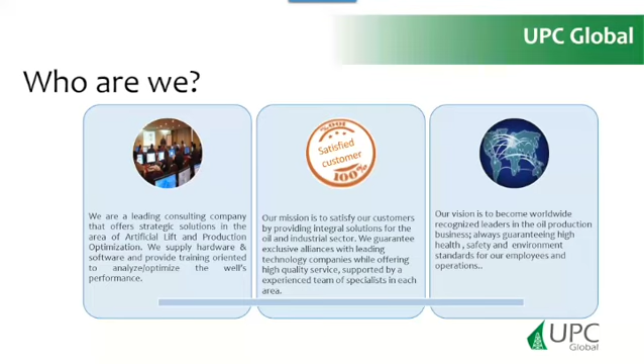We supply hardware and software and provide training oriented to analyze and optimize well performance. Our mission is to satisfy our customers by providing integral solutions for the oil and industrial sector. We guarantee exclusive alliances with leading technology companies while offering high-quality services supported by an experienced team of specialists in each area. Our vision is to become a worldwide recognized leader in the oil production business, always guaranteeing high health, safety, and environment standards for our employees and operations.

We have more than 20 years in the oil industry and have 4 bases in Latin America: Venezuela, Colombia, Mexico, and also an operation in the United States, with business in more than 40 countries. We have some exclusive representations in Latin America, such as Echometer.

Our main services are field data acquisition, optimization, analysis, and elaboration of production plans, specialized trainings both presential and online through our academy or in-company online training, telemetry and automation, and also consulting and mentoring for petroleum engineers.

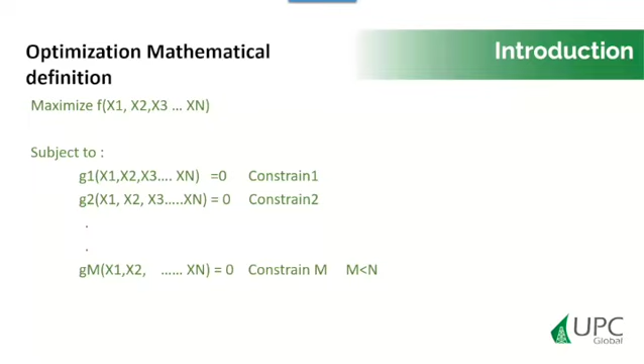So I have to have a function in mind to maximize, and constraints. That is math. And also, you remember that in calculus, that has to do with Lagrangian multipliers and so on.

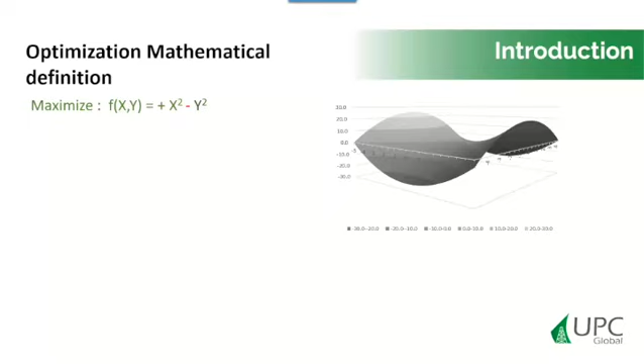So for example, in this case, I have this function which has two variables, x and y. This is the graph of that function. And then when we consider that the function is restricted to some value, it's different. The initial function, if I consider it, has no maximum, because it goes to infinite when x equals infinite and y equals 0.

But if I introduce some constraints, the problem changes a lot. It's no longer infinite. Where is the maximum of the function going to be? Well, sometimes we can compute some derivatives, but sometimes we can do some observations. For example, if we notice that x is always positive, x squared will always add, it doesn't matter if it's -5 or +5, whatever value we have is always going to add. So for maximization, I want to increase that to the maximum absolute value, as much as possible.

On the other hand, minus y squared is going to be always negative, always will subtract. So for maximization, I want it to be the closest value to 0, because if I have -5 or +5, it's going to be -25, it doesn't matter. So if you pay attention to the function, I want to have this value go to 0 and this value go to the top.

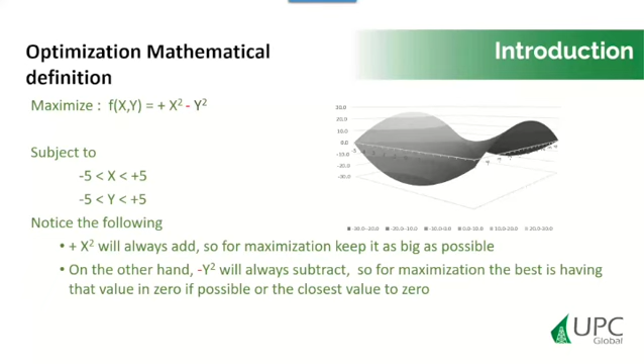So this is the graph, and then you are going to see here the same table. I'm going to see that the maximum is this. When you pay attention here, for a given value of x, always you consider a column for x fixed. The maximum is going to be when y equals 0, as I told you. So the maximum has to be over this, and then you're going to see that the maximum is 25 and 25. These are the two maximums of this function subject to this constraint.

What if the condition changes? For example, if I have x between -5 and 2, and y between 2 and +5, I want to minimize y, so it will be at y equal 2 and x equal 0. You want to see, and x equal to -5, so y equal to, you're going to see this is the value, 21 is the max between 2 and +5. So y has to be the minimum value, 2, and x is going to be -5. So we're going to have 21 as the maximum value in this cell.

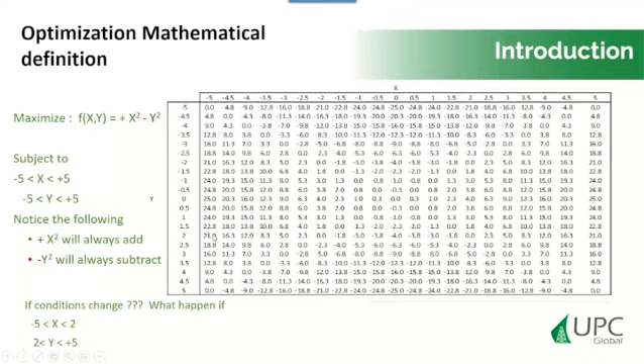So why am I telling you this? Because when you're an artificial lift engineer, keep that in mind. When you optimize, you have to keep in mind what is your function, what do you want to maximize. In general, if you don't have that clear, by intuition, we are going to maximize the favorable and minimize the unfavorable, as I did in this example.

In reality, we want to maximize production and extend the run life. But in reality, when you consider this, I am maximizing the net present value of my asset. Because if I'm producing too much and the run life is too short, then I have too many workovers, and then the economics is reduced.

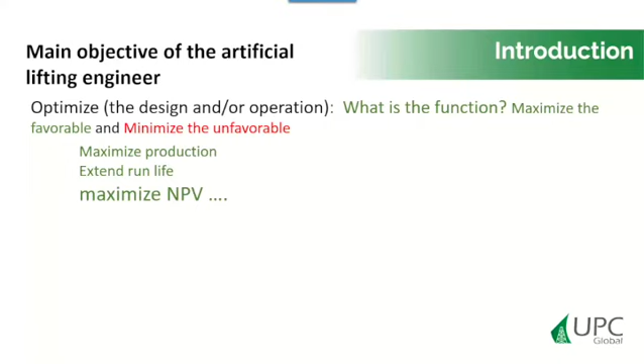So I have to reduce the lifting costs, resources, power, gas, logistics, manpower, reduce the deferred production on off time, and minimize operational issues. But then I have to keep in mind my constraints, subject to limiting factors like power, capacities, quotas, stresses, etc. Remember, anytime you are optimizing, you have to keep in mind your limiting factor, because that changes the maximum value.

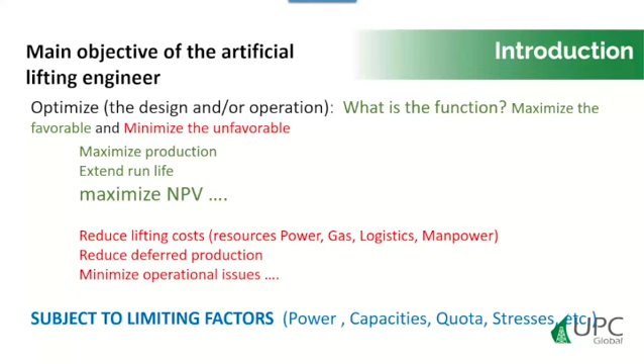So we have to understand, as we did here, what are my constraints. We must understand the limiting factor to achieve ESP optimization. We must understand each ESP component, its parts, and the way it works. We must understand ESP working principles and phenomena. We must understand how ESP and reservoir interact with each other. We must understand the effect of exceeding each limiting factor. We must understand how a component part could fail and why.

We must list the total possible failures and how likely they are to fail.

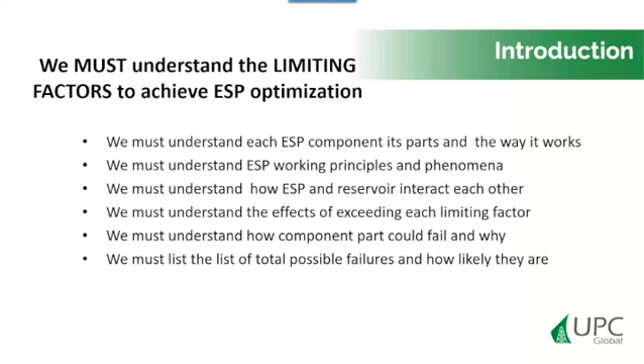There are no specific factors that we have to keep an eye on when dealing with ESP, because surprisingly there are several limiting factors to consider when you design and operate an ESP. Many of them are interrelated in not a simple way. Clearly, when a factor is not considered or misinterpreted, the consequence could be an ESP system facing problems, unable to reach the target rate, and/or having a shorter life than expected. For this reason, engineers must understand ESP working principles, phenomena, equipment components, their function, as well as having an integrated view with the reservoir.

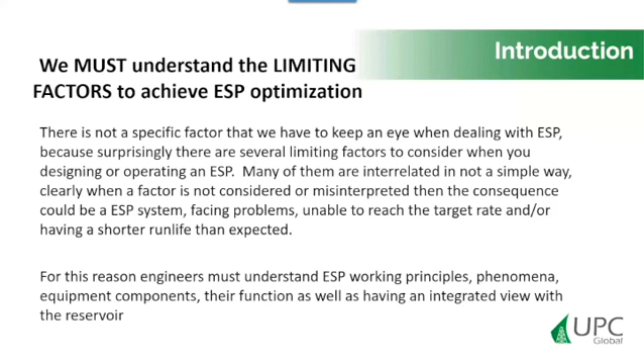So let's understand the components and the functions. Downhole, we have the power cable. This transports energy from surface to the downhole motor. Then we have the centrifugal pump, the multi-stage centrifugal pump.

The objective of the pump is to provide the head of pressure gain between the intake and the discharge. Then we have the gas separators, or sometimes we have only the intake, but when we have an intake we have natural separation. So it expels most of the free gas to the annulus to avoid this gas coming into the pump.

That is the objective: transmit torque to the pump shaft, because the separator is in between, so also to transmit power to the pump. The seal section is in between the intake or gas separator and the motor. First, it allows oil thermal expansion, and supports the pump shaft axial load. When you are pumping, the shaft exerts force downward, so somewhere you have to support that force. We call that the axial load.

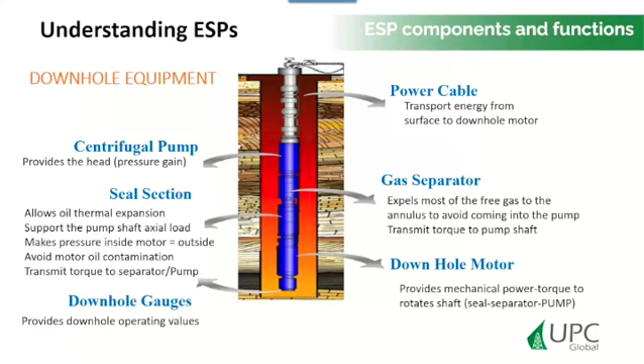These are the parts downhole, and now we have the parts at the surface. We have the primary step-down transformer, usually provided by the energy company, or if you have your own generator, then maybe you don't have this. The objective is to reduce from maybe 13,000 volts to 480 volts.

Then you have your VSD. The objective is to change frequency and provide power for the ESP motor. Then we have the secondary transformer. Its function is to increase from 480 volts at the VSD output to the motor voltage, which depending on the motor could be between 900 volts and 4,000 volts.

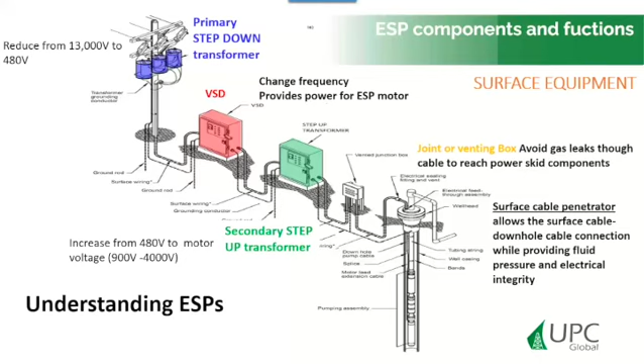Then we have the venting box, which is just to avoid gas leaks through the cable reaching the power skid, all to avoid explosion. Then we have the surface cable penetrator, which is just the connection from the surface cable to the downhole cable, providing integrity to the well.

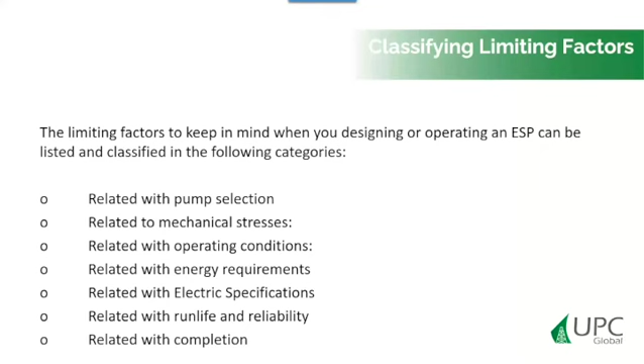Let's classify the limiting factors. The limiting factors to keep in mind when designing and operating can be listed and classified in the following categories: related to pump selection, related to mechanical stresses, related to operating conditions, related to energy requirements, related to electrical specifications, run life, and completion.

Let's go to those related to the pump.

The pump components are the impellers, which rotate. That part here we call the diffuser, the static part. We have the washers, this brown part, the housing or casing of the pump. We have the shaft here, the compression, and the bushings, okay, that are not showing there. So we have to know that there are...

...three types of impellers: radial, mixed, or axial. The type of impellers for the GVF, but also you have to take care with the GVF and the sand capability, the design of these impellers. Some are better for sand, and the materials matter too.

The floating or compression assembly. The pump can be assembled floating. In this case, the impeller can move a little bit free, but in the axial direction. When you are in compression, it's attached not only radially, rotating, but also axially. That is going to change the load in the shaft. If it's floating, the load in the shaft is less. If they are assembled compressed, they are going to add more load to the shaft.

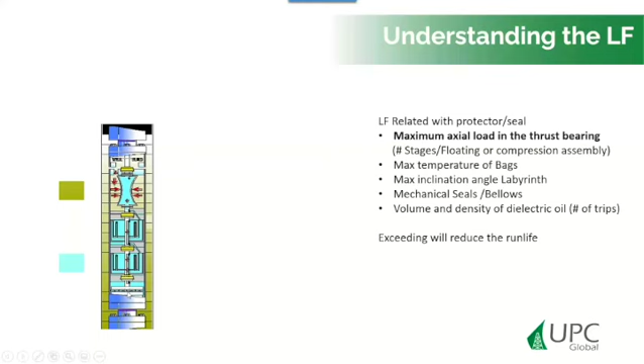Let's go to the seal or protector. The protector here, this is the thrust bearing. The axial load of the pump in the shaft is going to be supported by this thrust bearing, which is at the end of the protector.

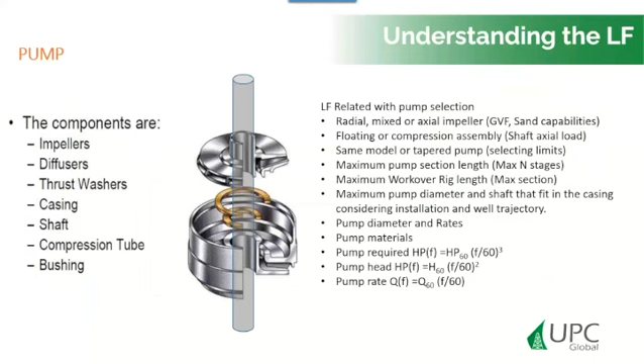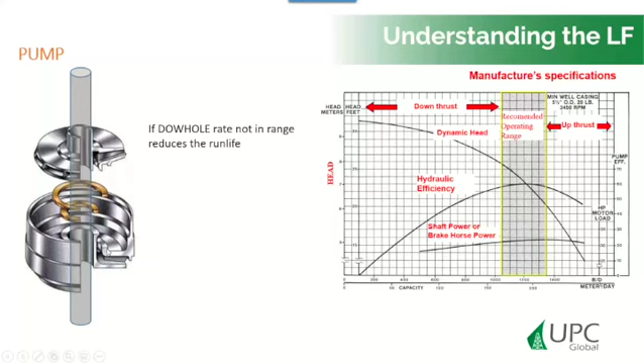This is a limit, and this load depends on whether you have a compression or floating assembly. The number of stages you can support in floating is higher than the number of stages you can support with compression. When you're handling solids, you use a compression assembly to avoid contact between the diffuser and the impeller. But the price of this is that you cannot add as many stages as you have in a floating assembly.

Then you have bags inside. What is the maximum temperature of the bags? If you have a labyrinth, what is the maximum inclination you can have with a labyrinth inside?

You have mechanical seals and bellows. Then you have to think about the maximum temperature that you can handle. This is used for SAGD, the bellows, in SAGD in Canada, so they can support a very high temperature. And then you forget about the bags in that case.

Then you need to know the volume and density of the dielectric oil, depending on the size of the seal section. The number of trips you can have before oil contamination in the complete chamber is higher than if you have a small volume. If you exceed any of the thrust-bearing load limits, you are going to reduce the run life.

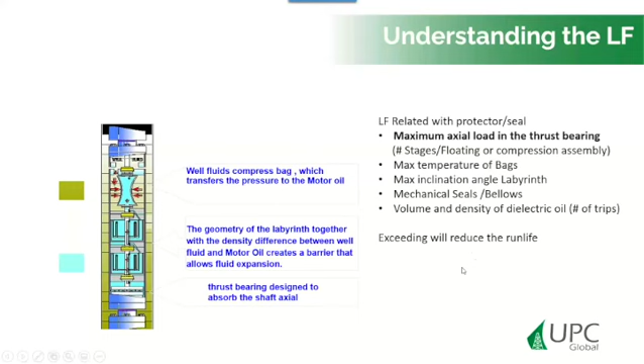Let's think about the mechanical stresses. There's the maximum quantity of solids, which you have to measure in parts per million. Usually people don't measure that, but you should do it, or at least have an estimation.

There are some online measurement devices at the surface. They are qualitative, but not quantitative. Still, you get an idea of what's happening in your well, at least.

Then you have the maximum axial load on the shaft. What I mentioned in the previous slide, the shaft is having a down force always, okay? The shaft always has a down force, and this is going to be supported by the thrust bearing.

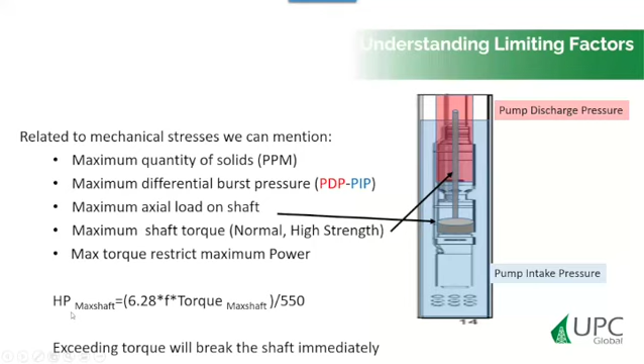That's why you have to take care when you start a pump. It's very important, so that's why you start at a very low frequency to have little stresses, little differential pressure, little power required, and then you increase the frequency in a ramp, because the peak in torque could be very big and you're going to break it, even if your static torque is low. The dynamic torque could be very high, and then you can break the shaft.

The rotary gas separator: each series of diameters has a maximum flow rate that the separator is going to work properly within. If you are in the range of flow rate, then the separator is going to have a very high efficiency, about 90%. If you exceed that, if you are above, not below, then the separator is not going to work, and you're going to have only natural separation, which is 30%. That could be the immediate problem.

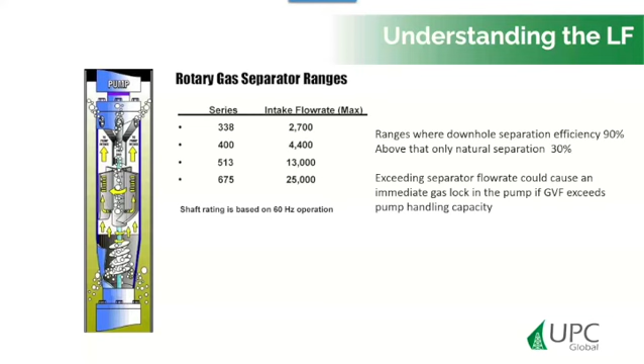Maybe you can exceed the maximum gas volume fraction, the GVF, and then you can have problems. You can have a gas lock in the pump because you exceed the capacity of the separator.

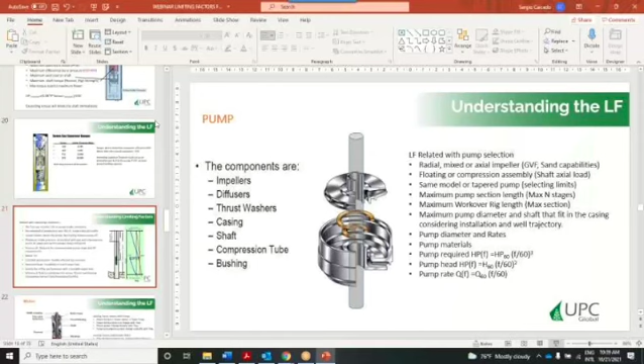Rated operating condition, the GVF, oh my God, the gas volume fraction, you have to keep an eye on that. At the intake conditions, when you change the intake pressure because you increase the rate for the same IPR, you want to change that, okay? The recommended production rate is going to change the intake condition because the inflow performance is associated with that.

If you are not in the range, then you want to reduce the run life. If you exceed the GVF, you can have a gas lock condition, and then you can have problems with your pump. You're going to have to trip the pump. If you have a gas lock condition, you have to trip. Then, on the starting line, if you don't trip, then you are going to overheat the motor, and then you can have a failure in a matter of hours.

Minimum intake pressure is associated with gas. The lower the intake pressure, the higher the free gas of the pump, and it's also related to submergence. Let me explain this. You can have a water well with no gas, but if I don't have liquid at the pump, then I have what we call a pump-off condition. This value has to be analyzed with the casing head pressure, I'm going to explain that later. Having only intake pressure is not an indicator that you are right. You can have 2000 psi intake pressure, and maybe you can have no liquid at the pump. I'm going to explain that later.

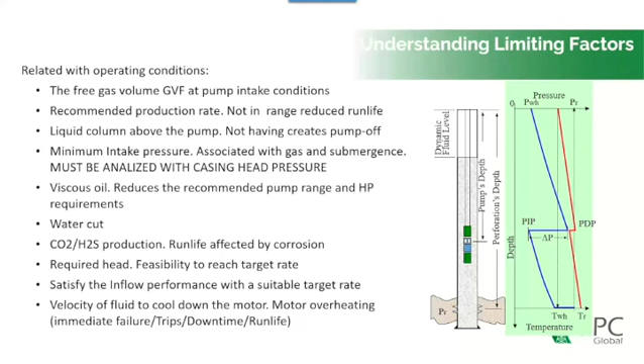Due to the thermal expansion and cooling in the protector seal section. Okay, the motor limiting factors related with energy, power, surface related.

They have to take care with the maximum winding temperature, which depends on the manufacturer telling you how much your motor is able to handle in temperatures. The problem is the isolation inside the motor. If the isolator fails, then you have a shortcut and the failure is immediate.

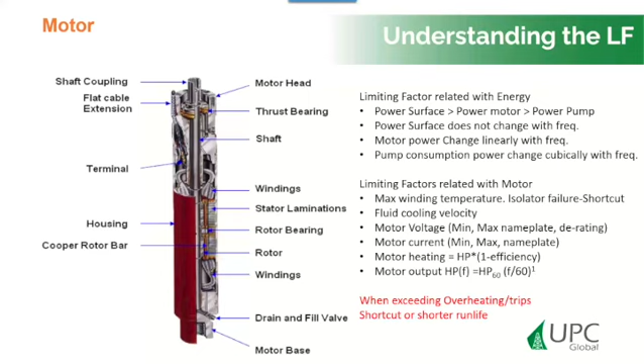And the motor power in the shaft, as I mentioned, changes linearly with the frequency. When exceeding the overheating limit, then you have trips. If the trip fails or the alarm setting is not properly done, then you have a shortcut. Or if you don't reach that critical condition, then at least the run life is going to be shorter, just because of the trips and because of the degradation of the materials.

We're related with electric specification. We have surface operating voltage after the step-up transformer, not the VSD voltage. We have the motor nameplate and operating voltage - they are different, okay? The cable nameplate and the operating voltage - the voltage in the motor is equal to the voltage in the surface minus the voltage losses in the cable. So we have to be sure that the motor operating voltage provided by the surface should be close to the nameplate voltage of the motor, okay? If it is too low, then you have problems. Maybe you cannot even start the pump.

Motor operating voltage equal to the nameplate or less when de-rating, but check the current as I explained before. You have to check the current load - if the operational current load before the rating is too low, then you can derate. You have to check that the cable operating voltage is less than the nameplate cable voltage. If you exceed that, then the isolation of the cable is going to fail, and then you're going to have a shortcut.

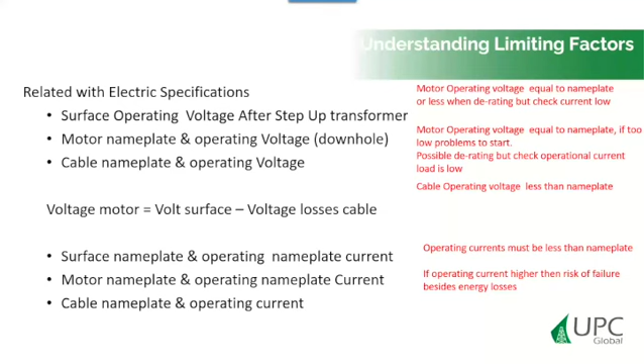Related with completion, maximum dog leg severity - for that, people say like 10 degrees for every 100 feet, but that's just a thumb rule, an approximation. In reality, to know what the maximum is, you need to know the pump length, the pump OD, the casing ID, and then compute the maximum dog leg severity you can have for your pump, considering your OD, ID, and pump length.

If you ignore this, then you are going to bend the shaft during installation, and probably the cable can be damaged too. But at least the shaft you are going to bend, and the vibration and the run life is going to be shorter.

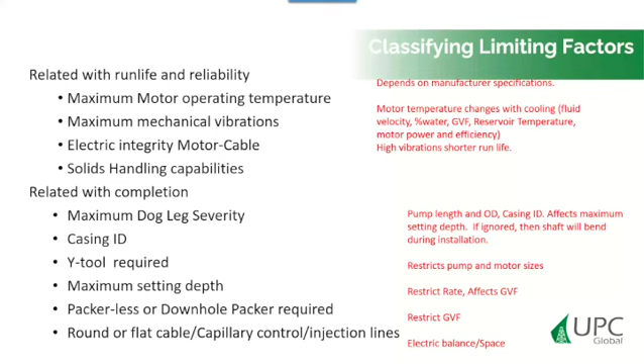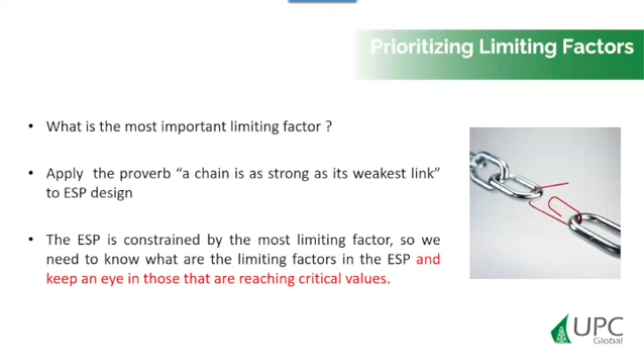Okay, I'm going to give you a very important example here. For example, in this case, I compute the maximum stages that you can handle with an example of design.

The protector can handle 749, the shaft 268. The motor can give you 490. The pump length, you can have a stack 470, and the housing 325.

So the minimum of this is the shaft. So I can only have 268 stages. Otherwise, you're going to break the shaft. It doesn't matter if the protector is okay and the pump is okay. You're going to break the shaft. So keep an eye on that one.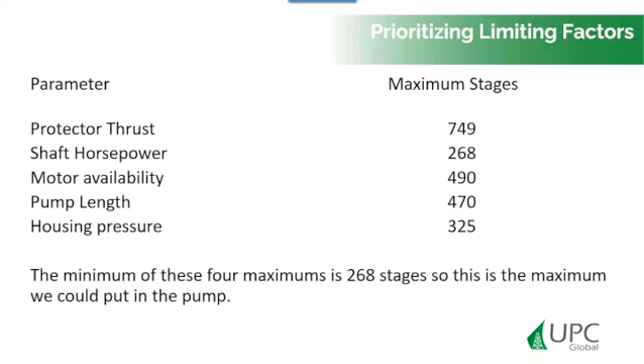If you want to improve that, then you have to say, I cannot use this shaft. Use a higher strength. How much is the higher strength? Maybe 300. So in 300, still having the shaft, if the highest strength can handle 500, then the next lower value is the housing pressure, the differential pressure. So you have to do something with your housing, or you have to live with this. Okay? So this explains exactly this slide and this photo.

Let's consider, when you are designing, the HP loading, and at what frequency are you designing? You want to see two slides, very important. So in this, you're going to see the pump consumption power as a function of frequency for a given number of stages. Let's say we have 200 stages, and that is the power.

So as the frequency increases, the pump consumption depends on the frequency to the cube. That's why you see the black line growing very fast. The motor power grows linearly with frequency. At zero frequency, zero power. And the VSD is constant independently of the frequency. Okay, so...

In this case, if this is my power in the VSD, the maximum I cannot work at this frequency is the intersection point between the blue and the black, because at that point the surface can give me the power for the pump, but the pump is consuming more power than the motor can deliver. So this intersection point cannot be handled. I can handle at this.

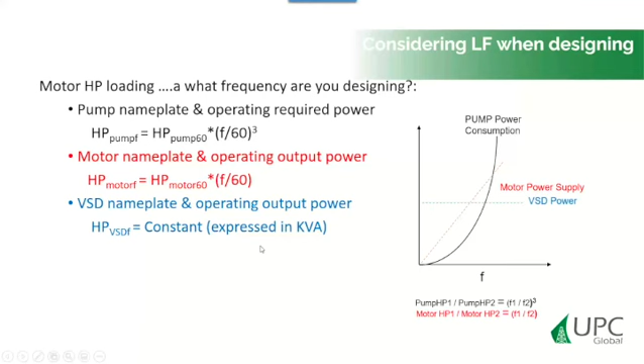Okay, so that's important to know the affinity laws. Okay, so just to show you, suppose what is the frequency you are going to design.

For example, if the load factor at 60 Hertz is 100, then it's impossible to increase frequency, because when you have 65, the pump is going to require more than your motor can give, so you cannot. So at 60 Hertz, the only thing you can do is reduce frequency. As you can see, when you reduce frequency below 60 Hertz, then the motor is going to have more power than the pump, as you can see in the graph.

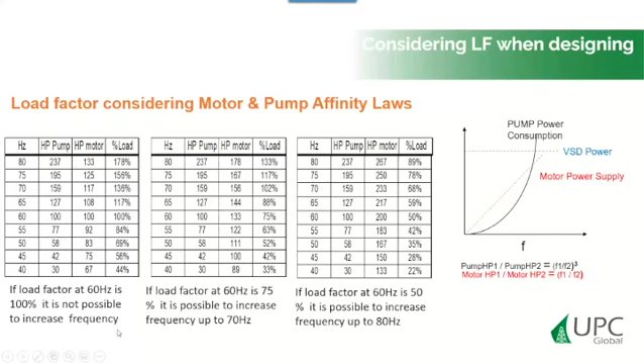If the load is 75% at 60 Hertz, then you can increase the frequency up to 70 Hertz, a little bit less, 69 probably. But you cannot go over 69, 70 maximum, okay? If my load power factor at 60 Hertz is 50, that means you have power in the motor to increase up to 80 Hertz, as you can see. So take care with the load factors and the frequency you are designing, okay?

When designing pump selection for your ESP, what frequency are you designing to reach the target rate? That's the design frequency. Some people in the Middle East design at 50 Hertz; here in the US, 60 Hertz. But be sure to check, depending on your application, maybe it could be 70, maybe 40, I don't know. Check what frequency you are designing as your reference starting point.

The pump must provide the required head pressure gain, the differential pressure between discharge and intake, to produce the target rate. This differential pressure has to agree with the nodal analysis. What is the expected pressure in the tubing for that target? What is the pump discharge? What is the expected intake pressure from nodal analysis for that target rate? These two things must agree, they must match.

Check for the maximum GVF, free gas into the pump, that the ESP can handle. Not the GOR—do not check for GOR, please. You can reference the EIPR UPC webinar on the YouTube web page. Check that webinar; I show cases with very high GOR and no gas at all in the pump. If your GOR is very high but your intake pressure is above the bubble point, you have no gas. And the other way around, you can have a low GOR of 200, but if your intake pressure is 100 psi, you have a lot of gas.

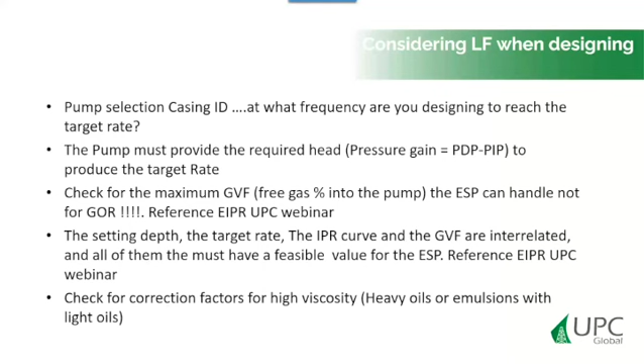Check for correction factors for high viscosity, heavy oils, or emulsions with light oils. You can have high viscosity with light oils if you have emulsions. That changes a lot the capacity, with correction factors in head, rate, and power.

Try the bigger pump OD to have the bigger shaft if you can. When having uncertainty in the reservoir pressure and productivity index, select the lowest value of both, because that will be the most severe condition for pump head, free gas, and power requirements, to avoid unexpected limiting factors.

Sometimes people are too overconfident and use a very high reservoir pressure and a very high productivity index. Then in reality, when they go to field, the values are less. What happens is that for those assumed values, you are going to reach the power limit, the head limit, or the burst limit. You are going to get surprises in the limiting factors when you over-predict the reservoir pressure and productivity index.

Take care with that. Select the load of the motor at the design rate and frequency to provide flexibility to increase the production rate in case productivity index and reservoir pressure are higher than assumed. That's what I mentioned here.

Try to use the highest voltage, lowest current motor for the required HP, but check for voltage limitation at surface while considering the cable voltage drop. Sometimes there are HSE restrictions, especially on platforms where there is a lack of space. Usually they avoid high voltage because of HSE safety for people passing nearby, rather than engineering reasons. Sometimes you don't have a step-up transformer that can reach very high voltage. You don't know—you have to check that.

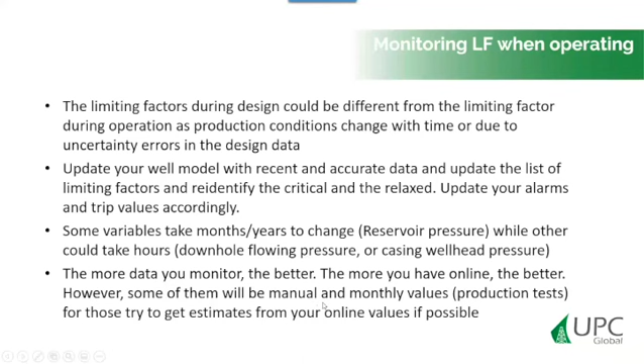Update your alarms and trip values accordingly. Some variables take months or years to change, like reservoir pressure, while others could take hours, like the downhole flowing pressure or the casing wellhead pressure. Take care with that. The more data you monitor, the better; the more you have online, the better. However, some of them will be manual and monthly valued, production tests for example. For those, try to get estimates from your online values if possible—here is where to keep an eye.

This one is a real case, okay?

We simulate with design. This is for design. You have here the whole pressure, rate, gas, frequency, the intake pressure, submergence - that is the liquid above the pump - dynamic level, and total rate, free gas at the pump discharge pressure, and dynamic head.

So let's see what happened. Here you can see that for intake pressure you cannot exceed 66 hertz, otherwise you're going to have a problem. For the submergence, you cannot exceed 60 hertz also. By the way, at 71 you have no fluid at the pump at this value.

What happens here is when the frequency is too low, you are working in a very low range and you are out of range, below the range. And here you have how far you are below the range - you are 33% less than the minimum value at that frequency.

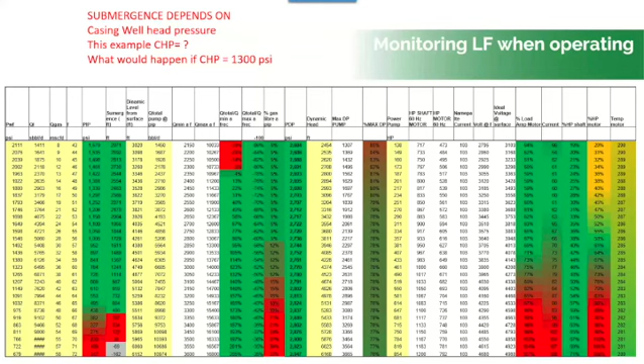What happens if the casing head pressure is 1,300 psi? That means that when you have 1,300 here at this rate, you have no liquid in the pump. So if you have this pressure in the casing, my limiting factor will be the submergence, and I cannot exceed 49 hertz. This is very important to understand. Okay, conclusion and recommendation to finish.

Understanding the ESP working principle, components, and associated phenomena is crucial to understand the limiting factors and their effects. Knowing the limiting factors in design helps to forecast risk when selecting equipment and materials. Having data lists of limiting factors in each well is highly recommended during operation to know the weakest component for proper monitoring, to keep an eye on those critical values.

There are values that must be analyzed together, such as casing head pressure and pump intake pressure, because pump intake pressure alone cannot detect an abnormal situation, such as venting valves closed.

Understanding limiting factors helps develop smart alarm algorithms, rather than having a dashboard with alarms based on constant set values. Well, that's all for today.

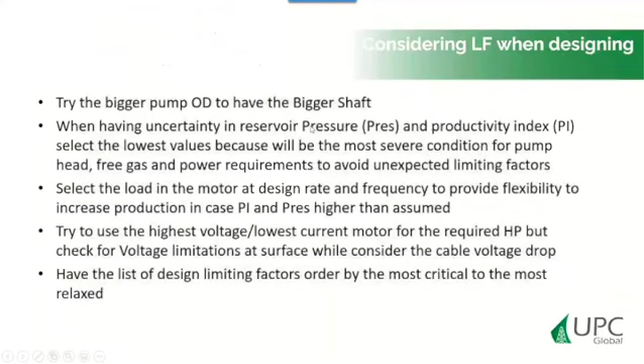Pay attention here: the maximum current does not depend on the frequency. Why is that? Because the current is related to the size of the copper, the conductor size in the winding. Suppose your windings have a cable of this caliber, which is very small, so in this cable you cannot exceed more than 5 amperes. If I use a cable this thick, then you can handle 50 amperes. It doesn't depend on the frequency.

Current... maybe you can increase the current 30%. So you can decrease the voltage by 30% of the voltage of this motor, and the current is going to increase and still stay in range. So you have to do the math with the current, because what you cannot exceed is the current.